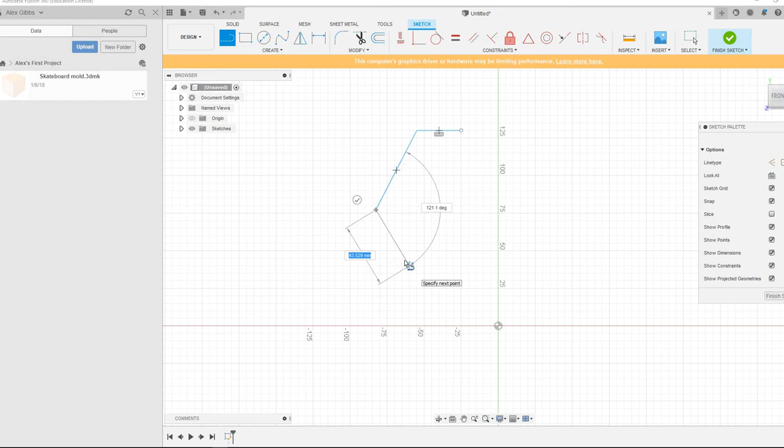And I'll just start off with, it makes this shape. And I'd just like to make that outline. And so when you're doing this, you see how it kind of pops in there with a dotted line. If I click on that dotted line, it's going to be constrained to that dotted line. It'll lock it to that. So whenever I'm doing a sketch, I try to make sure that it's not getting constrained to anything unless I purposely want it to be constrained. So I don't want it constrained to that.

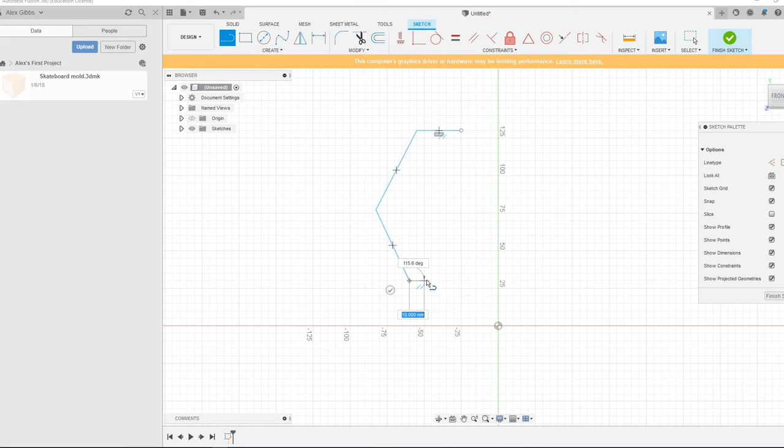And so I'll click there and then up a little bit. Again, I don't want it constrained to that. I do want it at horizontal, and then I'm going to go across. If I clicked it there, it's going to constrain it to the midpoint of that second segment that I drew, and go up. This one I do want constrained to this dot though, because it is in the drawing. It is in line with it. And so that's kind of a rough outline up and down of that side view that you have.

And this is how I would start this part, from that side view, and then do an extrusion lengthwise, and then start adding all the flanges on later on. But this will give you kind of the starting point, and then what I'm hoping you'll do is come back to me with more questions if you have questions going forward.

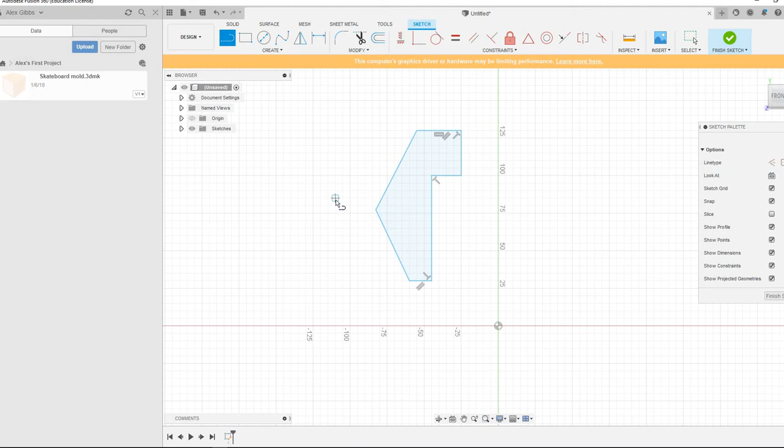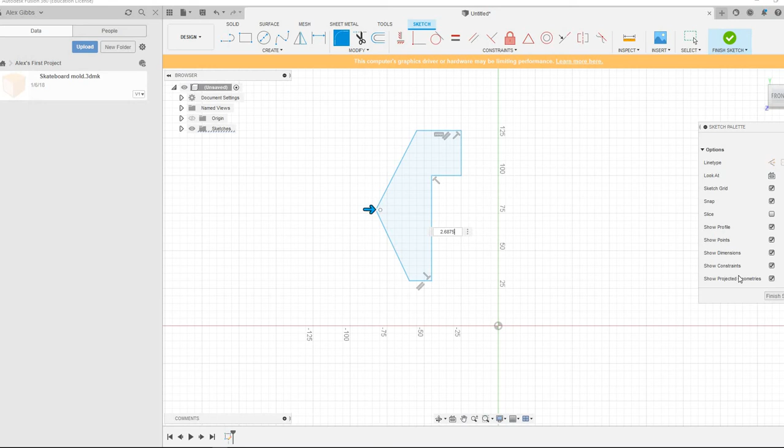And so at this point, we've got to add some fillet in the drawing, and he's got it done in diameter, but the fillet tool is actually measured in radius. So if we're going to click that fillet tool right there, we click here for that arc. That fillet tool is measured in radius, and so we want to make sure that you're dividing that by 2 because he puts the dimension in there as diameter. And so I'm just going to hit divide by 2 in there. And so it'll give me that radius.

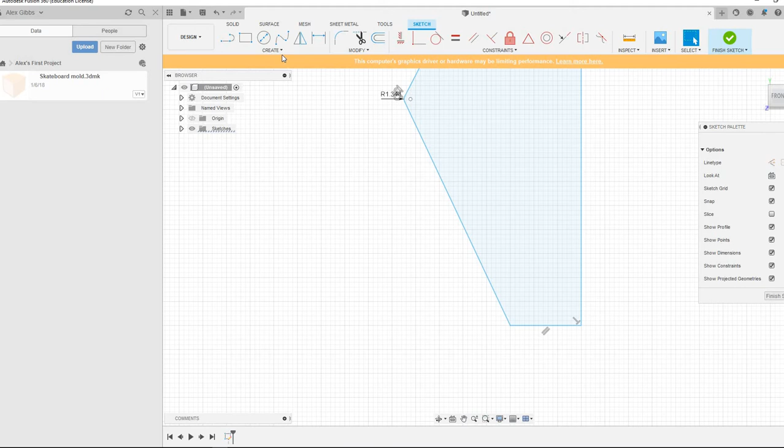Okay. Same thing with this one. This one might give me an error though, because it does go all the way to the edge. So what I had to do for this particular one is I had to do an arc, a 3-point arc, and I connected it from this point, and I made it tangent to this line in here. And then I used the trimming tool to trim off that extra piece right there. And then I could come back in and dimension that arc.

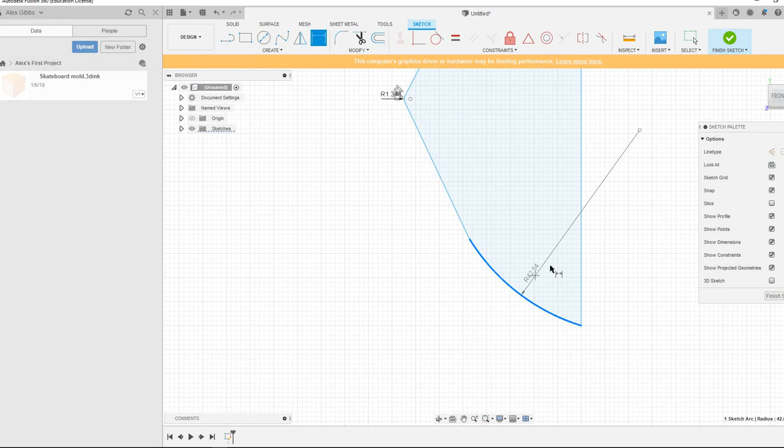Where are my dimensioning tools? Let's go cancel. All right, inspect. Let's see if it'll just let me. Sketch dimension, great, there we go. Radius. Again, it's in radius. Is this document in inches? Does it say? I don't see any units on it at this point.

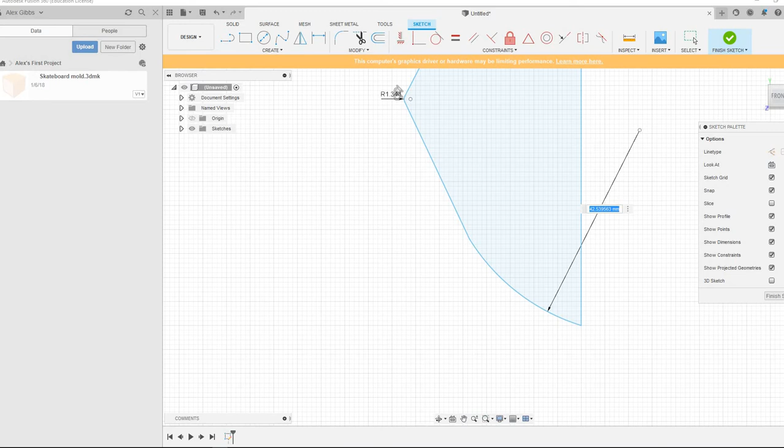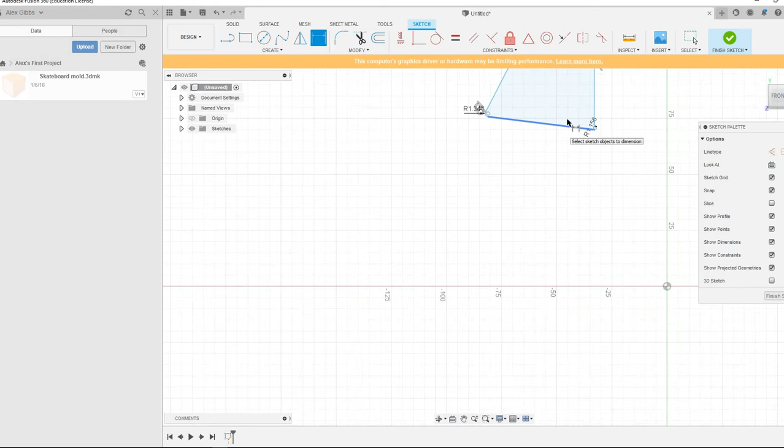I'm not seeing units on it, so if it's inches, just make sure you put inches. If it's millimeters, make sure you put millimeters in there. I would think it was inches because you're probably not gonna have a hole that's 0.11 millimeters. So let's see, you want that radius, again, going from that side is going to be 2.3125, and we're going to divide that by 2. All right, and so it's kind of getting funky in here because we're missing some of the other

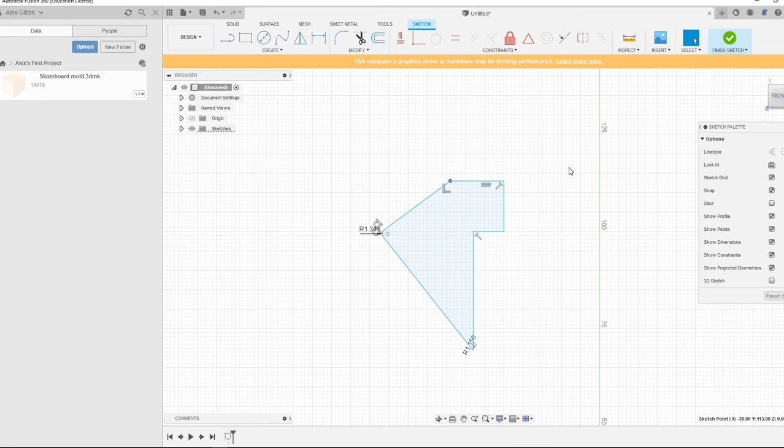dimensions in there, and so we've got to move some things around. So I'm going to move this guy. Well, let me move this guy. Yeah, there we go. That's a little bit better. We'll just try to keep it proportionate until we get some actual dimensions in there. And then you have one last fillet in here, and this one's actually done in radius.

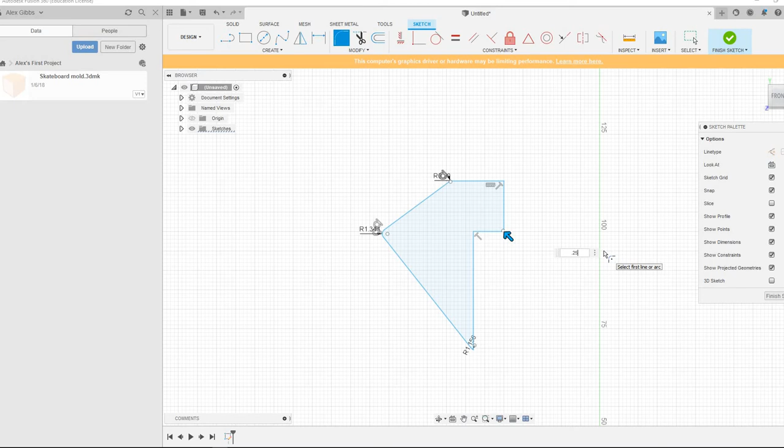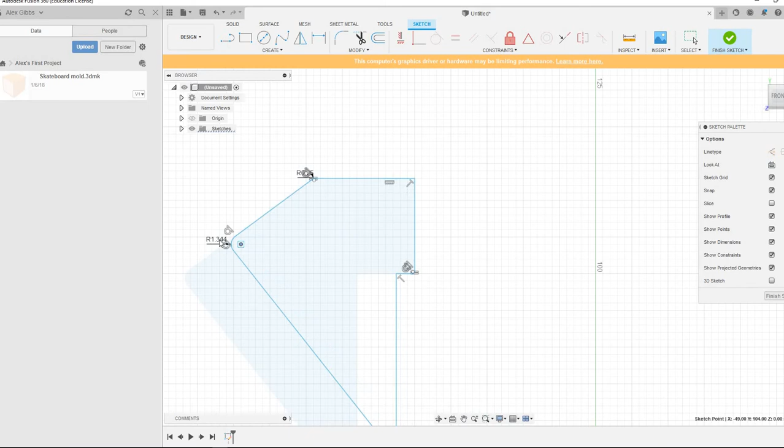And that's really kind of the things that you gotta watch out for, when you're putting a radius in there, or when you're putting a fillet in there. Fillets, or arcs, are typically done in radius, and then the full circles are typically done in diameter. And so I'm not sure why in that drawing on the left hand side it's giving you the diameter. Just keep in mind that you pay attention to things like that, because that's usually where people kind of start messing up. Sorry.

So we've got to start putting some other dimensions in here. So I'm going to now look at that front view, and we've got to add some of these dimensions together to get that full length of it. So I'm going to do an outer dimension now. There it is, sketch dimensioning. I'm going to go from here all the way across.

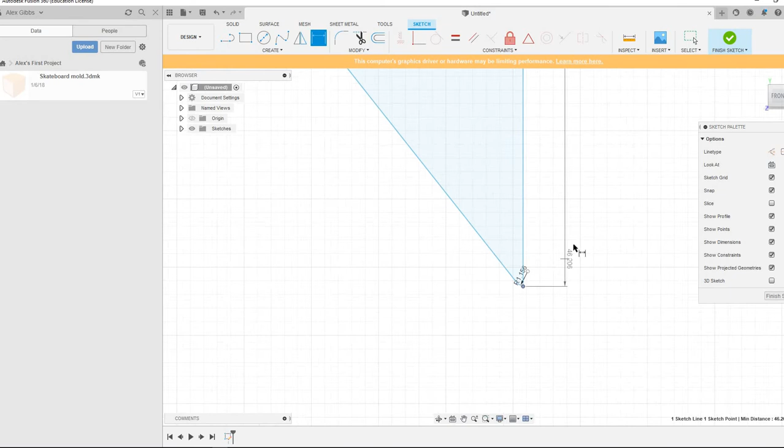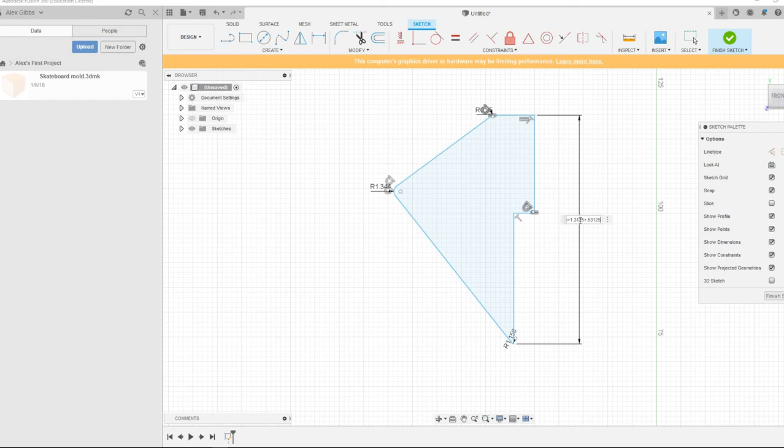Okay, and that one is going to be, it's a little fuzzy on my end, so I'm just going to give it my best estimate. So I'm literally just adding the length of it because he doesn't have an overall length measurement in there, so you've got to add all of those together to get that length. Oh man, and it messed everything up. That's all right.

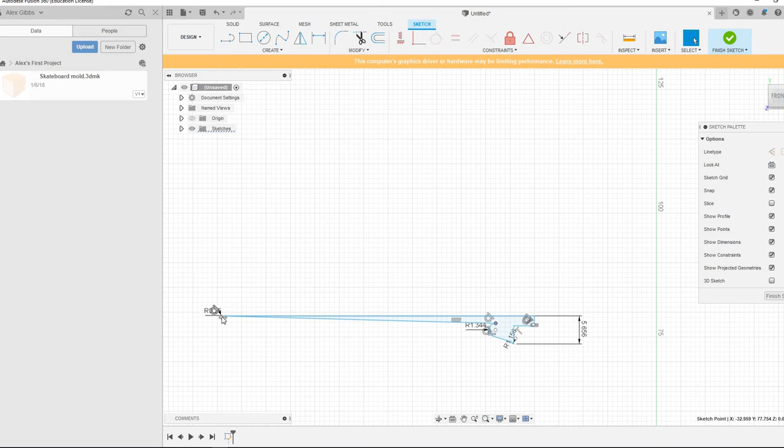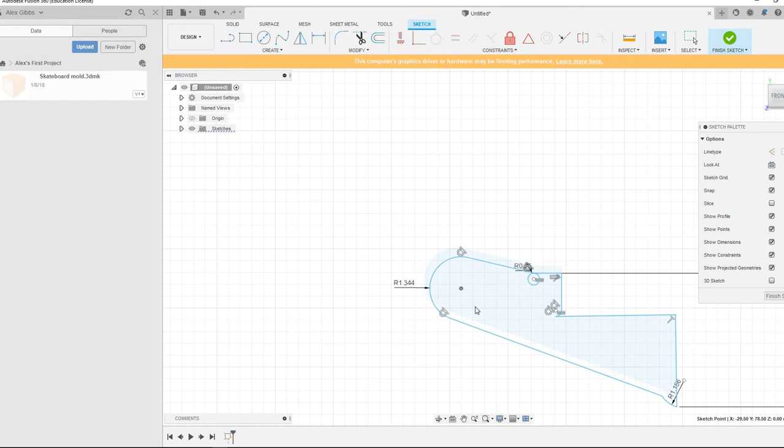So it just means that we've got to move our sketch to be within our parameter here. 1 millimeter, okay. I'm going to move this guy in a little bit more. Oh. This is interesting. There we go.

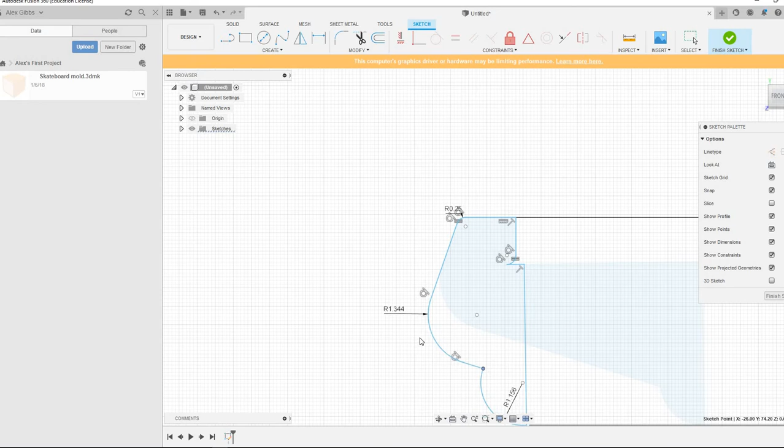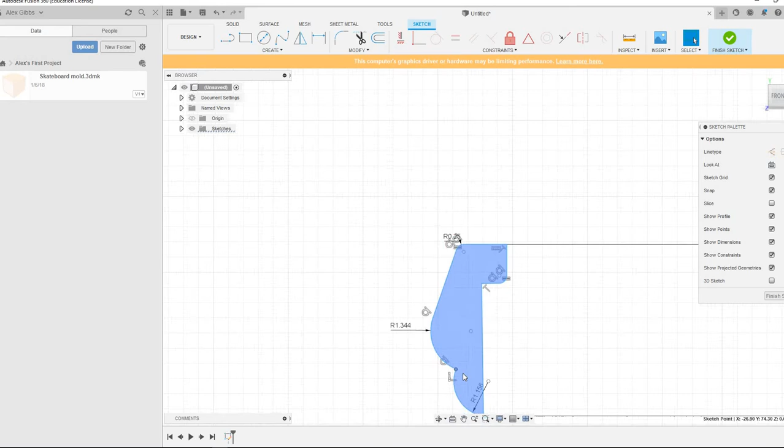Like I said, they're all really similar, like Autodesk, but there are definitely some strange differences. There we go. That's what we want right there. Boom. Okay. So sometimes you just got to play around with it to get it right.

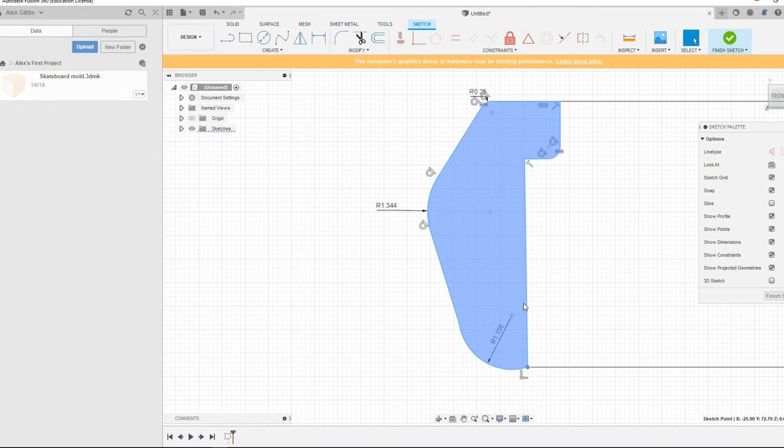And then it doesn't look like this line... You see how it kind of goes away from that edge right there? So that line should be horizontal, or it should be vertical. So there should be some constraints in there where we can constrain this. There we go. All right, so now that's perfectly straight up and down. You can see that constraint is already up on that guy. And then we can just continue going around and dimensioning it.

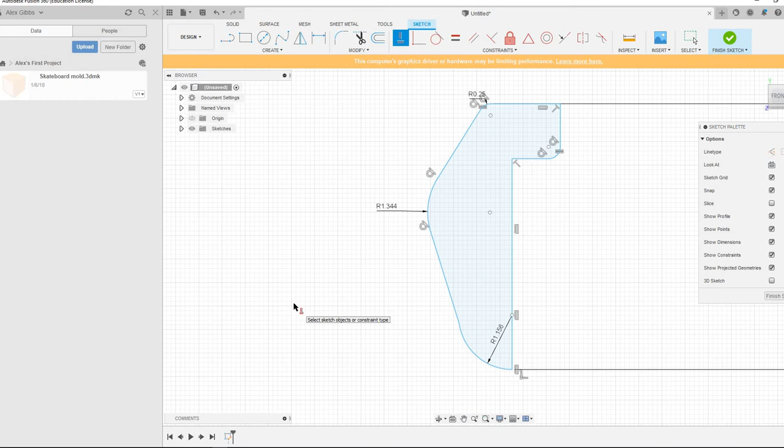So what I would do is I would finish figuring out all of your dimensions for these edges, and as much of your placement as possible. I would not worry about the holes that are going to be here and here. I would just fully dimension this thing and then extrude it first. In your email, it didn't sound like you guys had done the extrusions yet. So you're going to hit finish sketch.

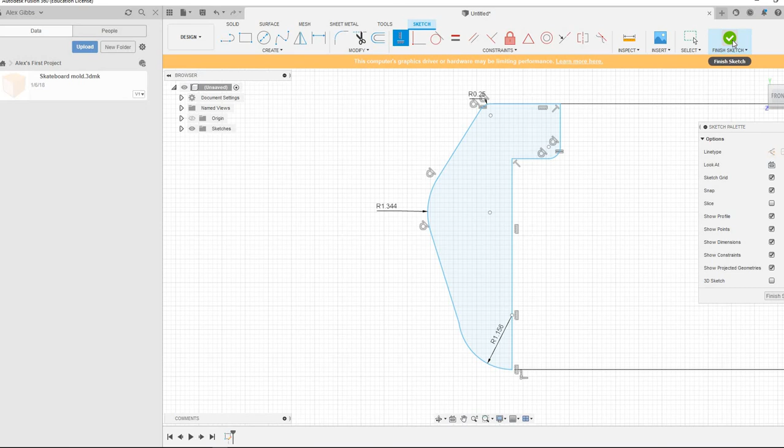I like to do an extrusion from an angle. Here's your solid extrusion. Select your profile, and it should be the width across. And again, he doesn't have an overall width, so he's making you do some of the work of adding and subtracting. He's really making you work on this guy, isn't he? All right, so does that line up there?

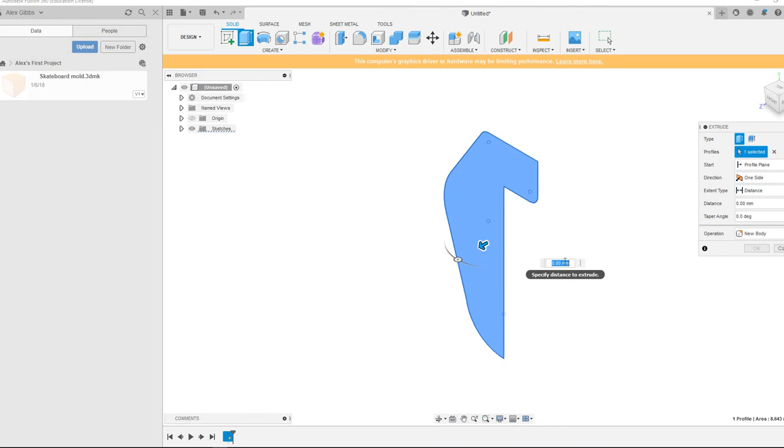Yeah, so I believe your extrusion is going to be 3.1875. I'm getting that info from the top view that goes all the way across of 3.1875. So you hit OK, and it'll extrude it. And so now you have this solid to work from, and now you're working from kind of a subtractive model.

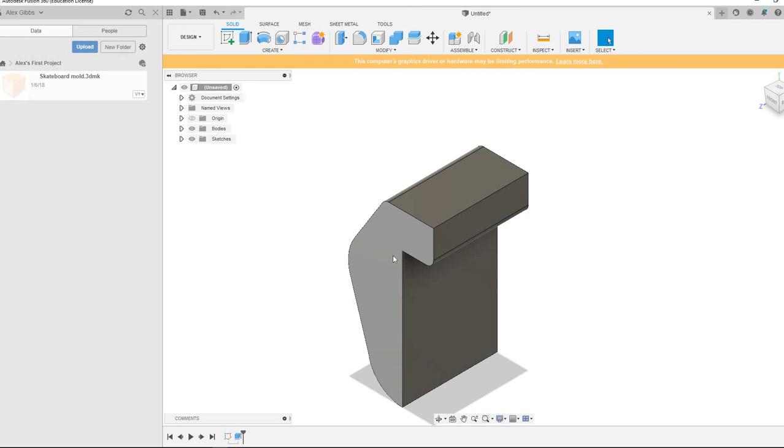When you're done with some of the extrusions, the plan will be to use the shell tool on this model, but I would not use it yet because you still need to do some work on this face right here to get that little section cut out. And so from here on out, you would just be adding sketches. So for instance, to this face, you're going to add a rectangle here and dimension that rectangle relative to your current model.

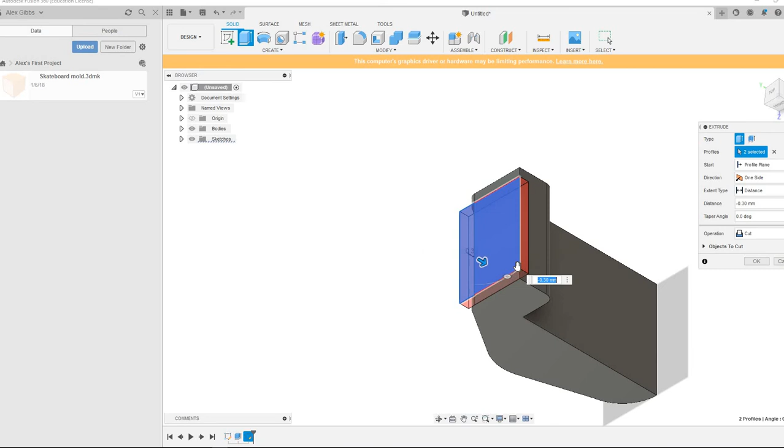Once you dimension that rectangle, you'll select it, and then you can change the direction. I want to go the other direction though. There we go. And that extrusion will cut. You'll dimension that extrusion correctly, and it'll cut that end on it. So before you use the shell tool, I would get this section in there because it's on the outside of it. And then the shell tool is super cool because he gives you a shell thickness, right?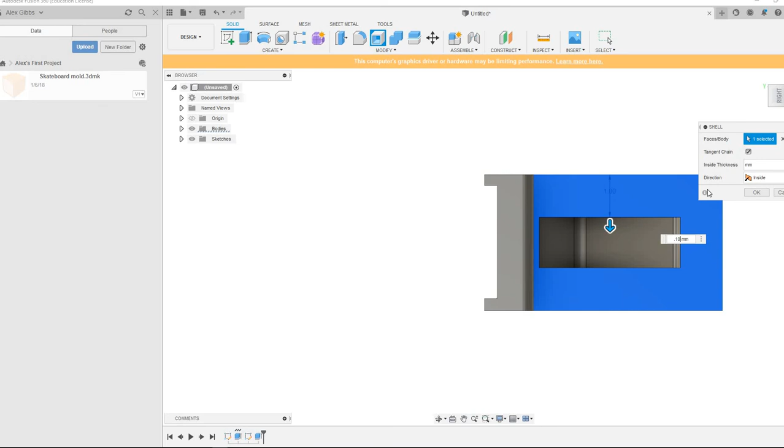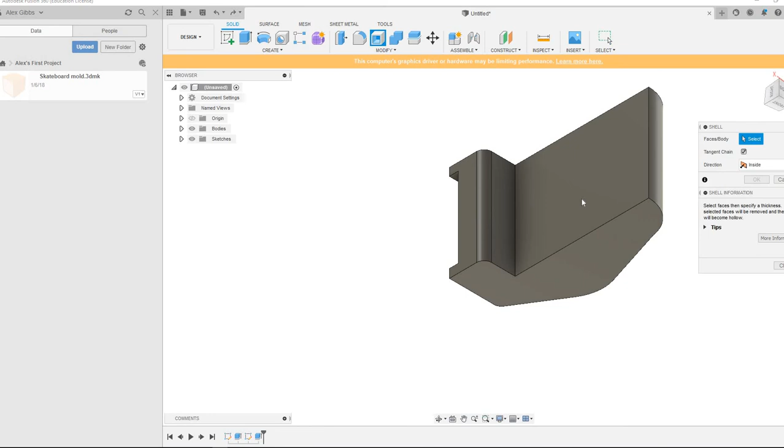Where's your shell? 0.105. And it will hollow that guy out for you, and you may have to do some extra cleanup on this because I believe that's got a shell to it as well. But that really wouldn't be too hard. There's a couple ways that you could attack that. Let's undo that and try that shell tool again. Yeah, there we go. I think that'll do it.

0.105. Yeah. So it looks like we got some... I don't think that'll be an issue once you create your shell in there. Well, I don't know. It looks like it might be shelled.

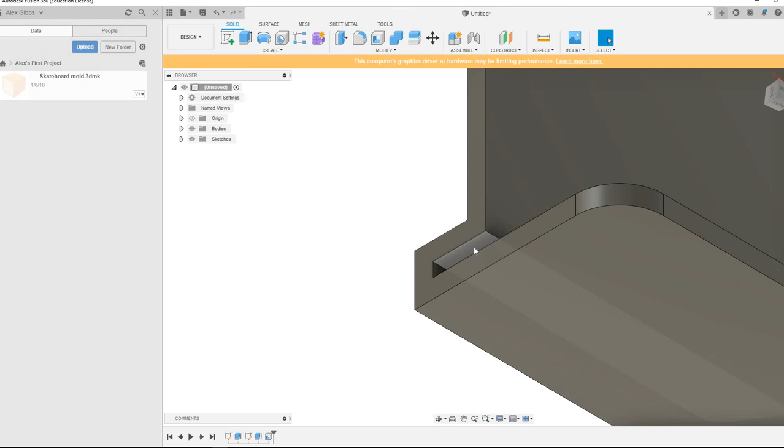So that'll get you at least started, and then why don't you email me with some specific questions, and I can post another video pretty quickly of any specific questions on the model, and we'll just keep going through. Hopefully this helps. Hopefully this gets you started.